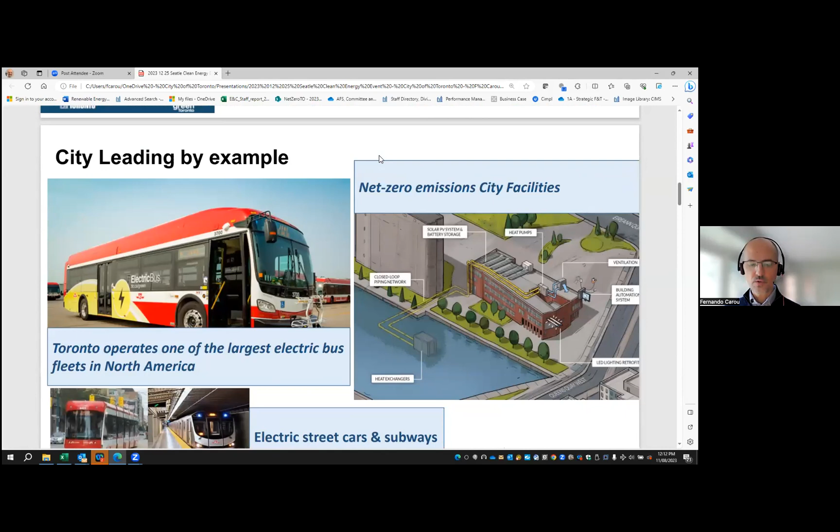We drive the policy, but of course it would be hypocritical if we don't lead by example, which we do. The City is operating one of the largest electric bus fleets in North America. We also have electric streetcars and electric subways, so once the buses are electric, it'll be a 100% electric transit system. And we're leading by making facilities net zero now, ahead of our deadline of 2040 for the city as a whole.

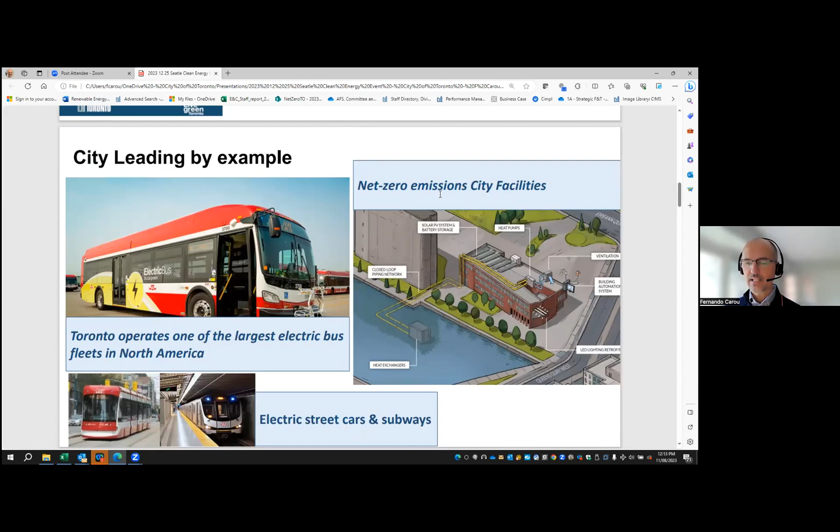The larger idea here, and we'll get to wastewater in a second, is that we're trying to leverage existing public assets, driving innovation towards reducing emissions. Toronto has been doing this for over 20 years. In 2003, we tapped the municipal drinking water system as a source of cooling in buildings. It supplies over 100 of the most iconic buildings in downtown Toronto with cold water, no heat pump required, saving in the order of 90% of energy and water, because there's no evaporative cooling towers required. Just this year we've expanded it, and we'll continue to expand it in the coming years to reach double the capacity we have.

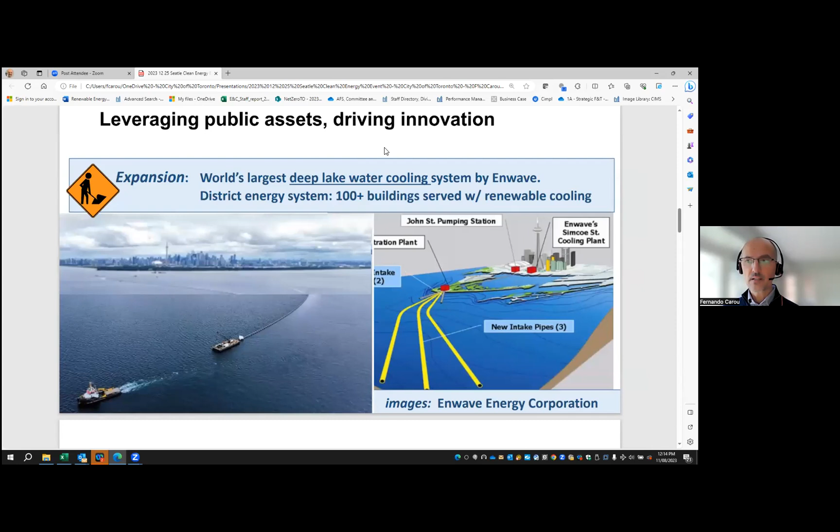You may think of Toronto as a northern jurisdiction, and we are, but our climate is very energy intensive - we have very cold winters and very hot summers. So when it comes to wastewater energy, we have a program, which I'll tell you about in a second, but we currently have under construction what we think is the largest wastewater energy project in the world.

The project partner is Noventa Energy, an energy company focused strictly on wastewater, headquartered in Toronto. This is the project where we're decarbonizing essentially the entire hospital by displacing fossil fuel use with renewable energy from sewers.

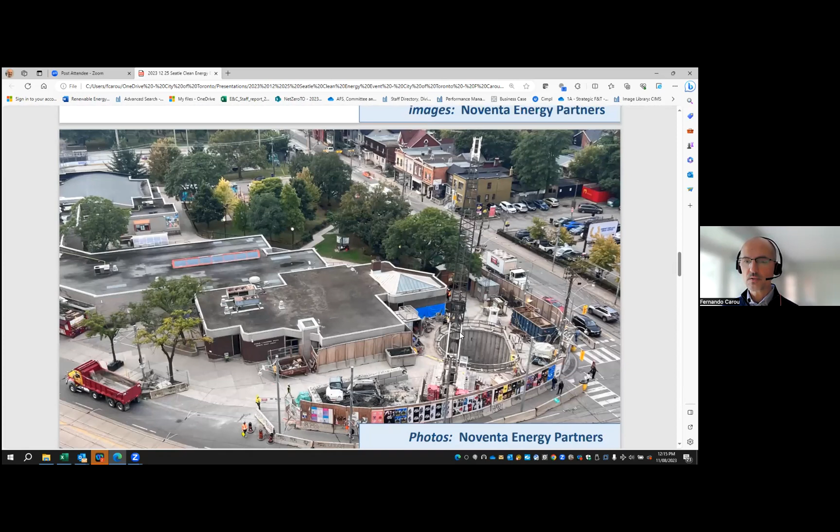So this is what the area looks like right now. Across the street on city land, there's a public library and parks and so on. You can see this hole here, and that's essentially a wet well that goes 60 feet down to interface with one of Toronto's largest trunk sewers, which serves about 1 million people, 1 million households. This is what the hole looks like, and you can tell from the scale that it's a massive civil infrastructure.

When it's operational next year, it will displace 90% of the natural gas used to heat buildings in the hospital campus during the winter, and there will be expansion of the system to serve new buildings in the campus.

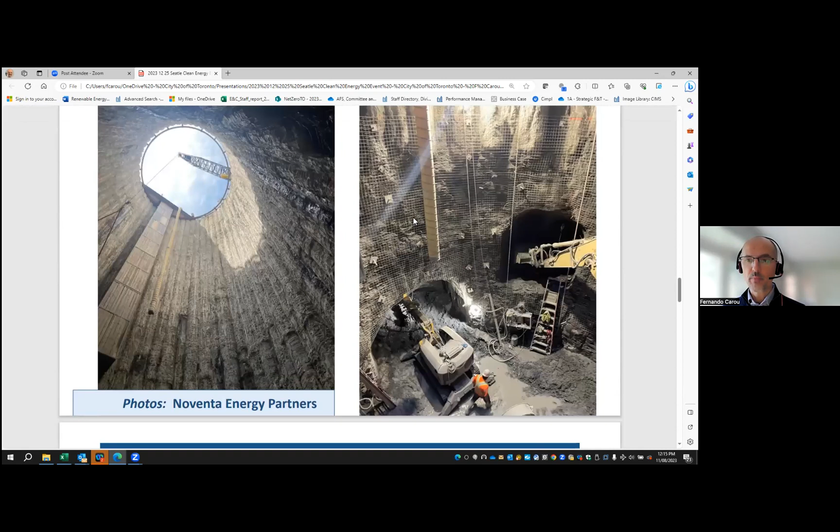So that's the project, and we do have a program, given that to move the needle and actually reduce emissions, like we have to by 2040 reduce all emissions, we want to do this as a program. We're trying to do 20, 30, 40 of these projects, so we have a wastewater energy program.

The way it works is it starts with a self-serve map where you can plug in the address, in this case the address of the hospital. It'll give you data on all of the wastewater resources closest to the hospital, and of course proximity to the resource is number one in terms of economics. There's information here around liters per second, available megawatts, and equivalent megawatts of capacity.

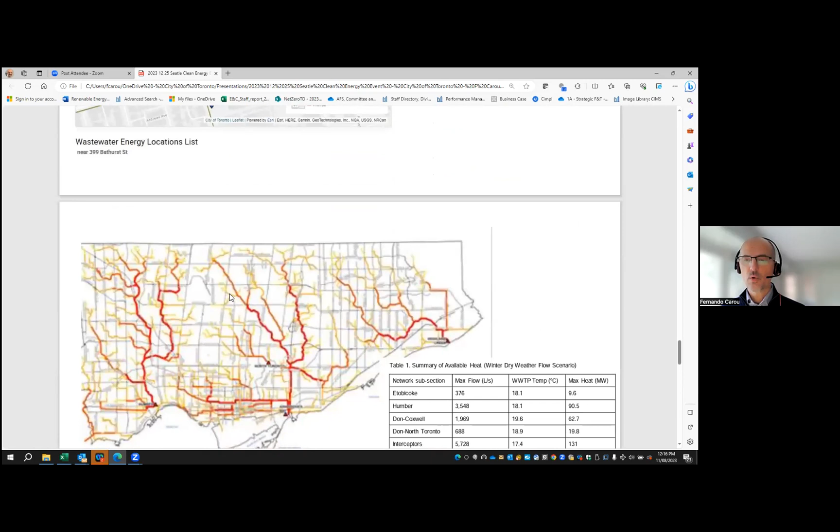And then once the wastewater resource is screened, in this case given that the hospital is so close to the resource, what we do is we go through an approval process.

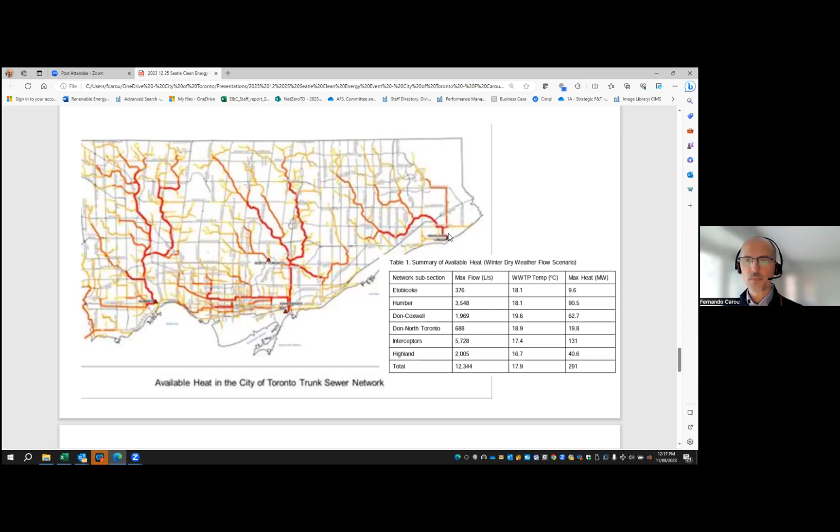To give you a sense of how much wastewater energy we have in Toronto, we modeled all of the sewer networks—these are the trunk sewers, the very large sewers. Red means more energy as the sewer connects to the 3 wastewater plants we have: one in Humber River, one in Ashbridges Bay, and one in the east part of the city. This is equivalent to about 300 megawatts that we can harvest, which would be 20 or 30 projects that could decarbonize large hospitals, universities, and government buildings.

So in summary, the concept here is for climate action. We would like to, and we are, leveraging municipal assets—drinking water in the case of deep lake cold water to cool buildings, and wastewater or sewers in the case of the hospital to displace natural gas.

The premise really is that cities and municipalities control numerous assets—streets, property, buildings, water and wastewater infrastructure. But we also have soft assets like mapping, information, and data sets, and we're stewards of these assets. So the question is, which ones do we make available, and for what purpose?

The other role we play, beyond making the infrastructure available, is that we help—again, like in the case of the hospital—go from 0 projects to 1, to the first one. That requires heavy lifting and innovation to get going, and then we typically put a program together to go from the 1 to the many.

In terms of delivery models, there's a bit of a choice to be made, or 2 extremes. In the case of deep lake water cooling, it was done through a then city-owned municipal agency, so it was what we call a direct delivery method. The infrastructure was financed, constructed, and operated by a city department, basically. Since then, that company has been spun off, and the city has realized tremendous value from that.

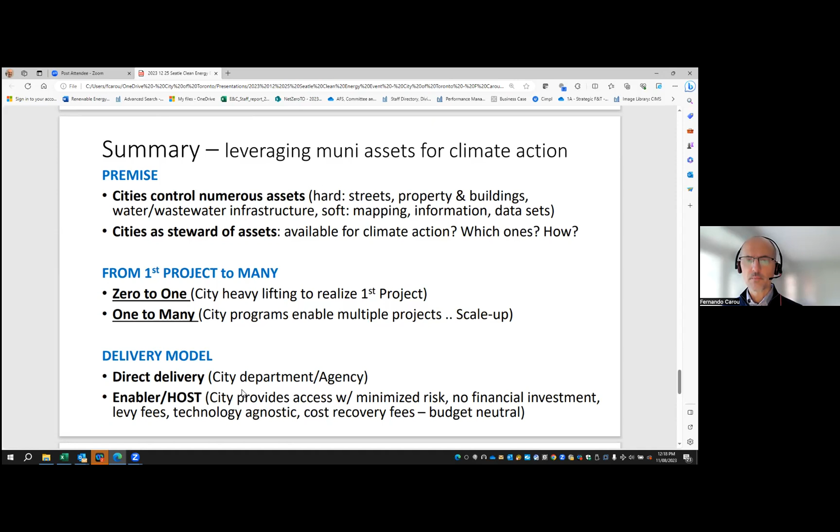So there are other options, other city assets that we're looking to leverage as well.

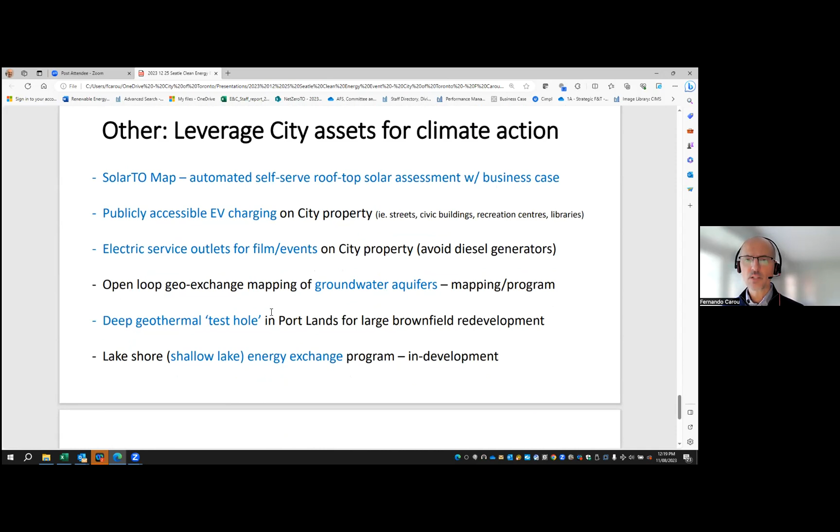Thank you, Fernando. I'm going to jump right in with a question because with Carbon Neutral Cities Alliance, we just had our annual meeting in Toronto and had a conversation about this. Fernando, you've talked a lot about leveraging city assets for climate action. Given that my work at CNCA is in communications and engagement, I'm constantly thinking about the public interface and how we build public and political will for this work. You alluded to it in your presentation, but can you talk about how you're messaging this to the greater Toronto public and private sector so there's more buy-in? I know you're using the hospital as a conversation starter, so speak to how you're using this moment to spur further similar action.

Yeah, excellent question, Michael. So wastewater at this scale, we're starting at a big scale for economic reasons. We're not connecting low density or homes yet, maybe in the future, but right now we're going after very large trunk sewers. So it turns out to be government to government, government to business right now, in terms of the opportunity, the projects, the financing, the legal agreements and so on.

But you make a good point. We'll have a local TV crew do a live show in early December as part of our climate action communication, because we're the stewards of this infrastructure, but it's not really ours, it's paid for by Torontonians through their water bill. So we're conscious of that, and we want to tell the story of what's happening in Toronto, that we're trying to innovate and do it in a way that represents almost zero risk to residents and their water system.

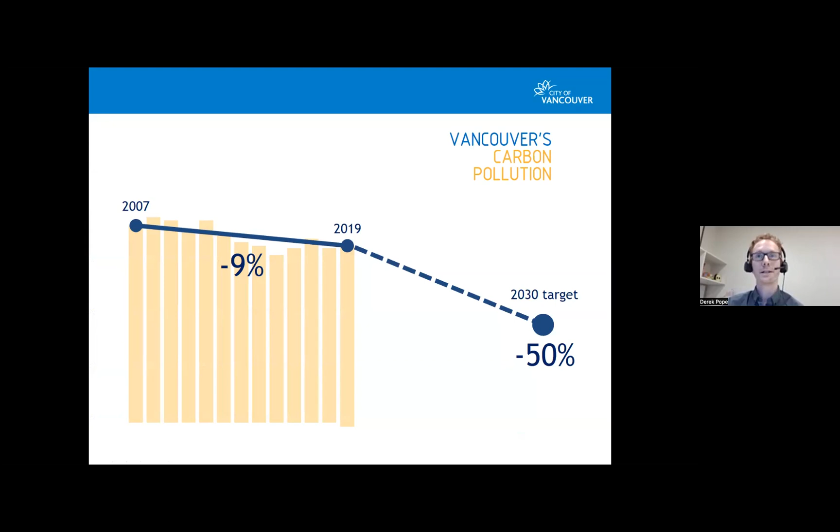To start things off, this is the challenge we're all facing. We need to decarbonize. The City of Vancouver has some very aggressive targets—we're looking to reduce our greenhouse gas emissions by 50% by 2030. When we look at where emissions come from in a city, the one thing that always stands out for me is just how much buildings contribute to our greenhouse gas emission portfolio, representing 55% of the city of Vancouver's emissions.

This is really why the Neighborhood Energy Utility exists. It's one of the tools that we have for tackling this challenge of moving to a more sustainable path for heating our homes.

Quick overview: the Neighborhood Energy Utility has been in operation since 2010. It is a city-owned and operated thermal energy utility, supplying low carbon space heating and hot water to an area within Vancouver. We operate it as though it's a commercial utility, so our rates are designed to recover all of the costs of the utility and a modest return on the city's investment. Currently, we target to deliver 70% of our energy from renewable sources, and as part of the city's Climate Emergency Action Plan, we have a goal to transition that to 100% renewable energy by 2030.

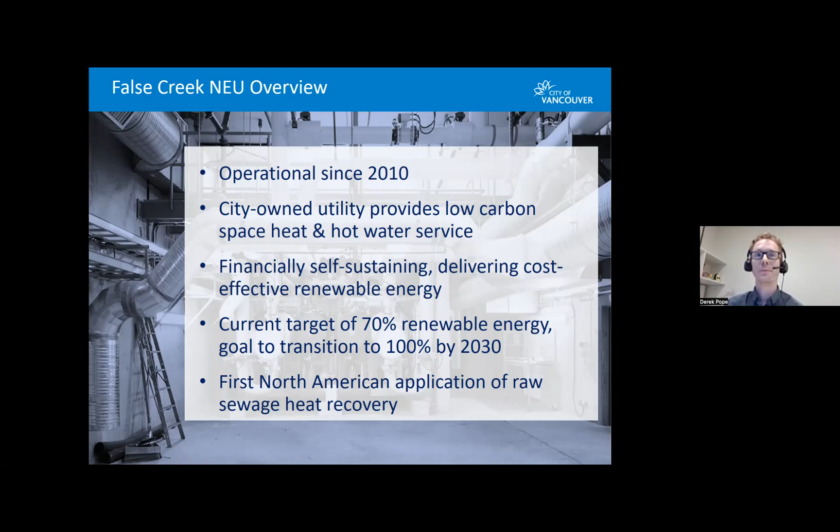What we've done is built our energy center on top of a sewage pumping station. Sewage is warm because we all take hot showers and run the dishwasher, and there's so much thermal energy stored within sewage—enough there for us to literally heat up a neighborhood. So we take some of the heat out of the sewage before it gets pumped onto the wastewater treatment plant, and we send that heat right back to the buildings all over again. A really nice energy cycle, working towards closing the loop there.

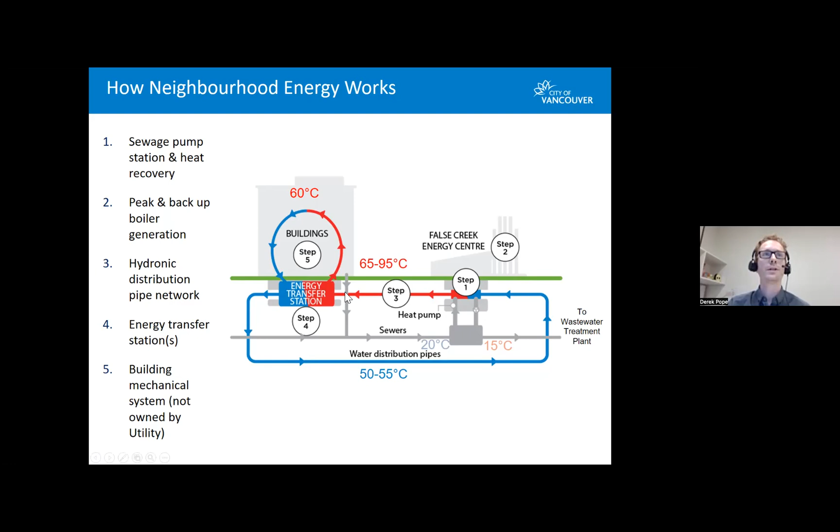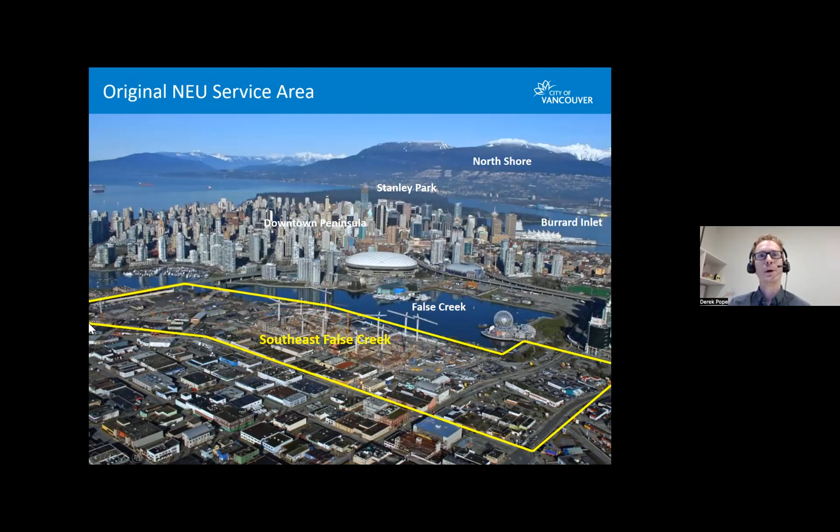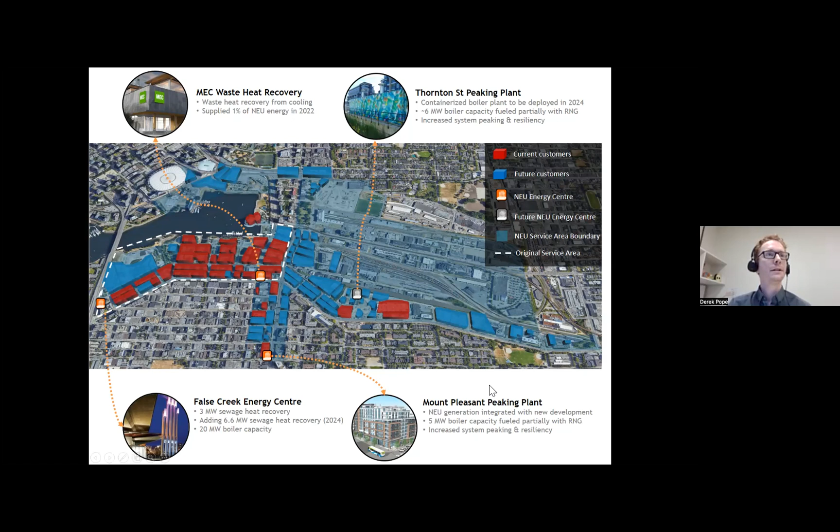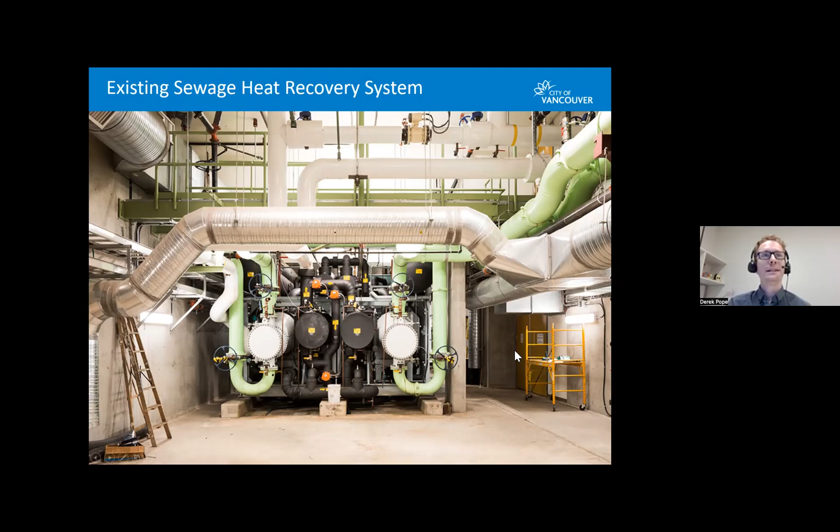Sewage stays relatively consistently warm, so the efficiencies of the heat pump remain over 300% even on those minus 10 degree days. So you make really efficient use of the electric grid, and that's something becoming more and more prominent in the conversation.

Moving on to our expansion project. We're at the phase now in the build out of the system where we're ready to deploy the next phase of sewage heat recovery. We're in the process of adding another 6.6 megawatts, which will more than triple the capacity we have today.

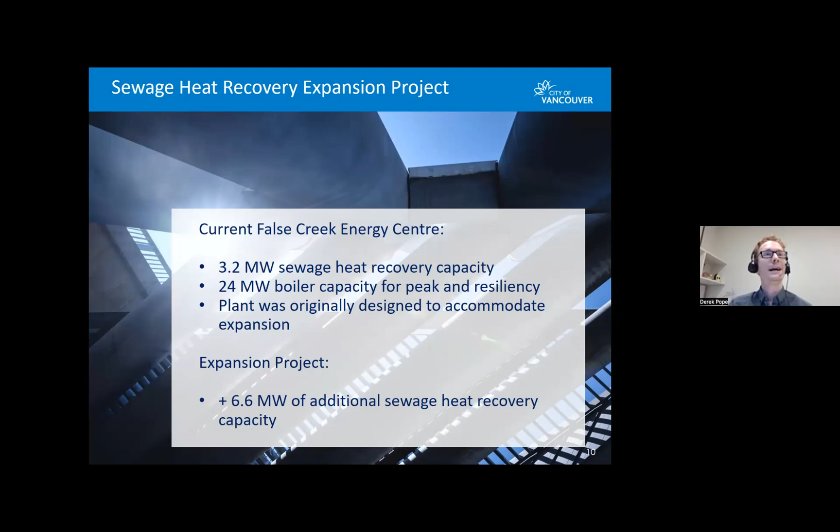Here's a schematic of the plant. Basically what you're looking at is a sewage pumping station. Sewage flows into what's called the wet well here. On the dry side, we have pumps that pump it off to the wastewater treatment plant. We of course take some of that sewage and extract the heat out of it through this heat pump. Here's the project area we have to work with.

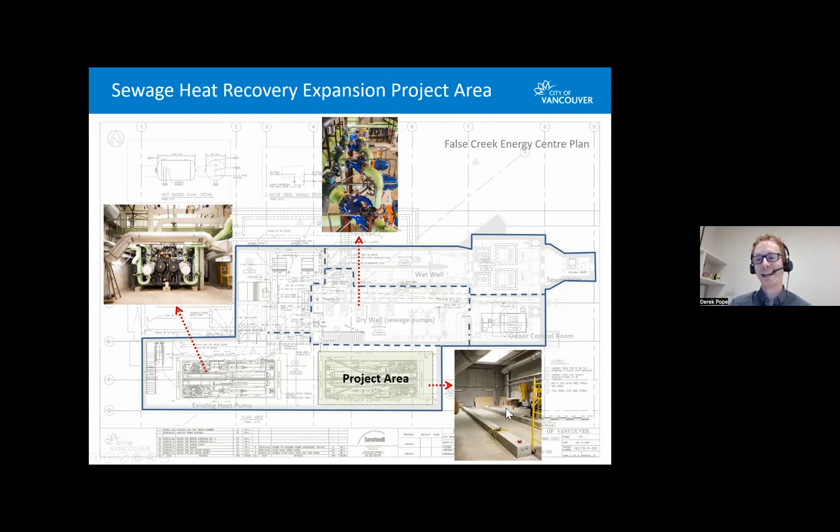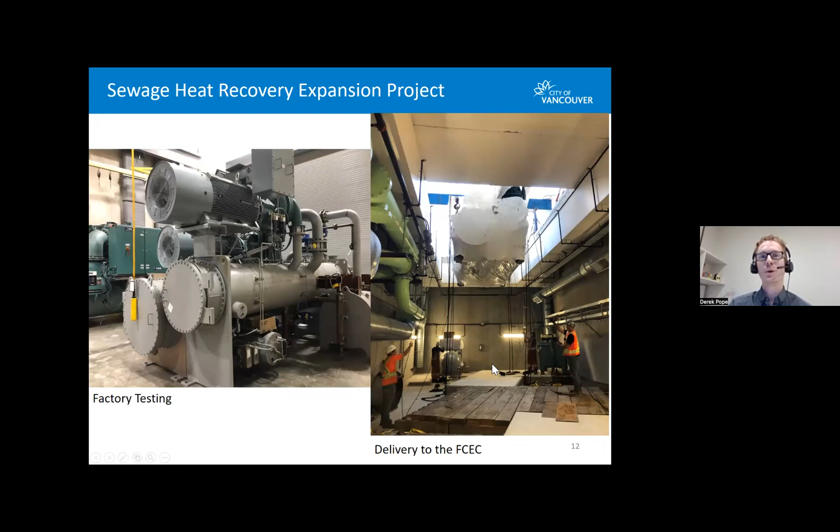Someone had the foresight to plan for system expansion, and for 10 years I've been showing a big empty space that one day will get filled. I can tell you this picture is now out of date—it's a very full room. We had 2 new heat pumps lowered into the energy center earlier this year, and work is now underway to get it connected. We had to bypass the sewage pumping station to do some key tie-ins.

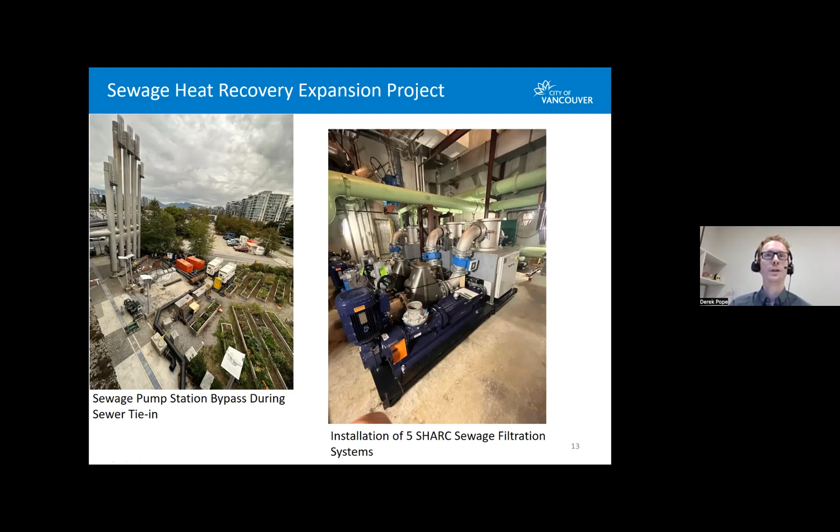We're also adding SHARC sewage filtration systems to pre-treat the sewage before it comes into our plant and through our heat pumps. Lots of work going on, but we're looking to commission that in 2024, which will give a really nice boost to our low carbon energy security.

And just to close out, one thing that's been really rewarding is seeing how much district energy has evolved in the greater Vancouver area, and this helps illustrate that. Back in 2010, when the NEU was established, there were a couple of existing systems, but they were using almost exclusively natural gas. We really wanted to demonstrate district energy as a platform for decarbonization.

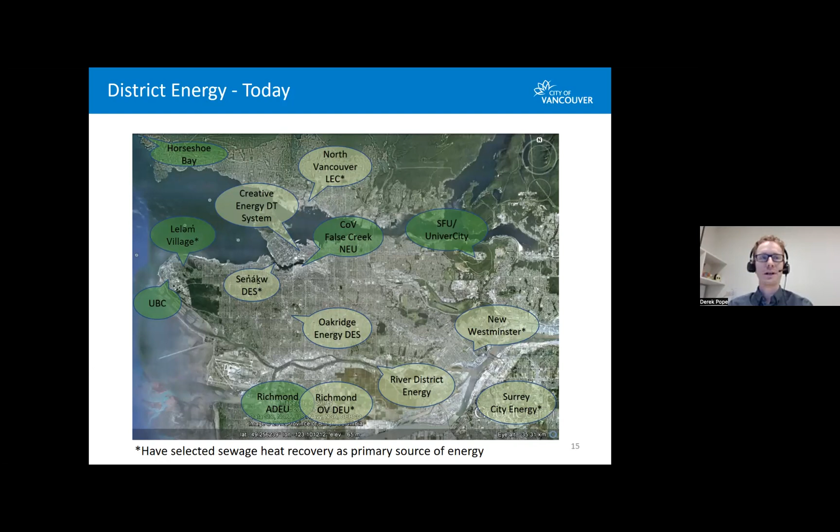Here we are today, and what you're seeing is, first, the existing systems have been decarbonizing, fuel switching off of gas using a wide range of different energy sources. You also see an explosion of systems being created, and most rewarding for us, the systems with an asterisk next to them—these are systems that have selected sewage heat recovery as their primary source of low carbon energy. It really shows how much things have changed since 2010, when the technology did not exist in North America, to today, when multiple systems just in the greater Vancouver area are going with sewage heat recovery as their energy source.

So that's the end of my presentation, and thanks for the time today.

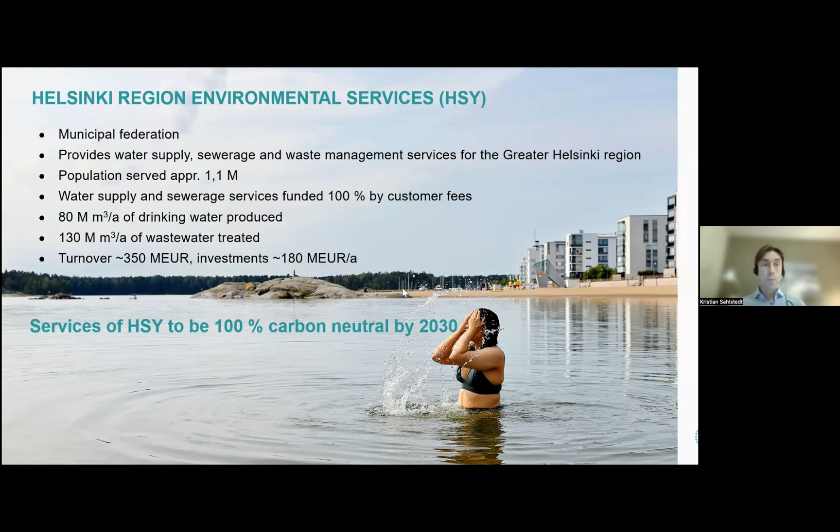It's discharged to the Baltic Sea at a distance of about 8 kilometers from the shore. At the beginning of these discharge tunnels, there are two heat pump plants owned and operated by local energy companies, and these are fairly big plants. I'll show you some data about them shortly, but we are recovering heat from treated wastewater, not raw sewage.

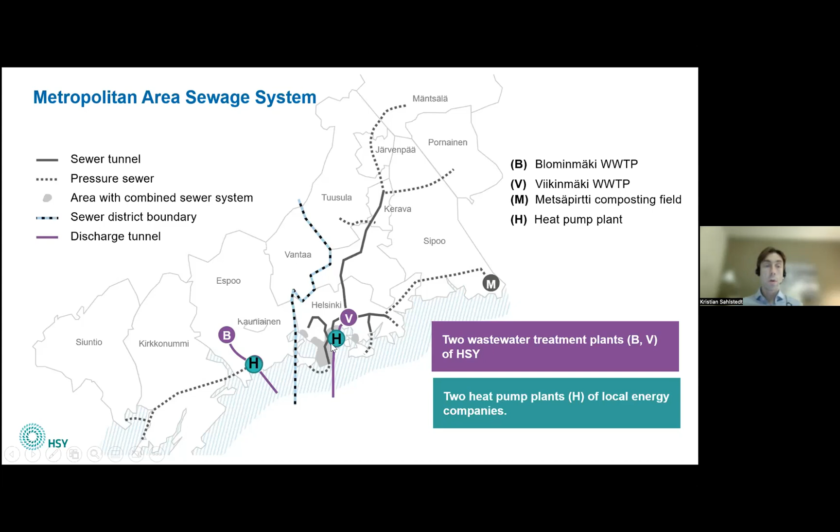This is what our wastewater treatment plants mostly look like. Up here in the Nordic capitals, we like to build them inside bedrock. In short, we have two treatment plants, one dimensioned for a population equivalent of 1 million, the other for 400,000. For those who know about wastewater treatment, the treatment process at both plants is essentially activated sludge and anaerobic digestion for sludge treatment.

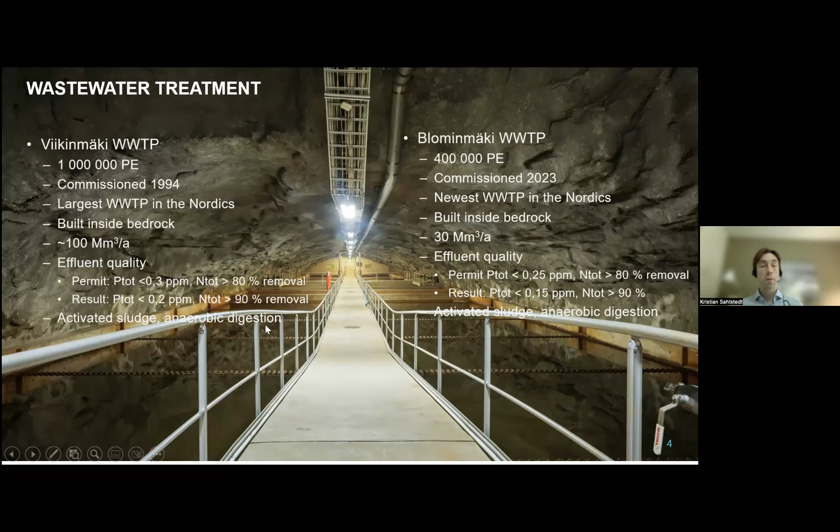The energy at the treatment plants—our main energy source is biogas, which we get from anaerobic digestion of waste sludge. Waste sludge is produced in the wastewater treatment process as a byproduct, which needs to be treated one way or another. We use anaerobic digestion, which basically converts the organics of the sludge into biogas.

We use the biogas 100% by ourselves. The main method of biogas usage is through these biogas-powered CHP engines, which we have on both of our treatment plants. That produces most of the energy which we use at the treatment plants.

Then we have some additional methods for extracting more energy. One is these ORC exhaust gas turbines, which are connected to the CHP engines. We have solar panels on top of both our treatment plants and pumping stations, and a small water turbine in the effluent discharge. As a whole, the Viikinmäki plant, the bigger one, is more than 90% self-sufficient in energy. Blominmäki, the newer one, is approximately 70% as the design figure.

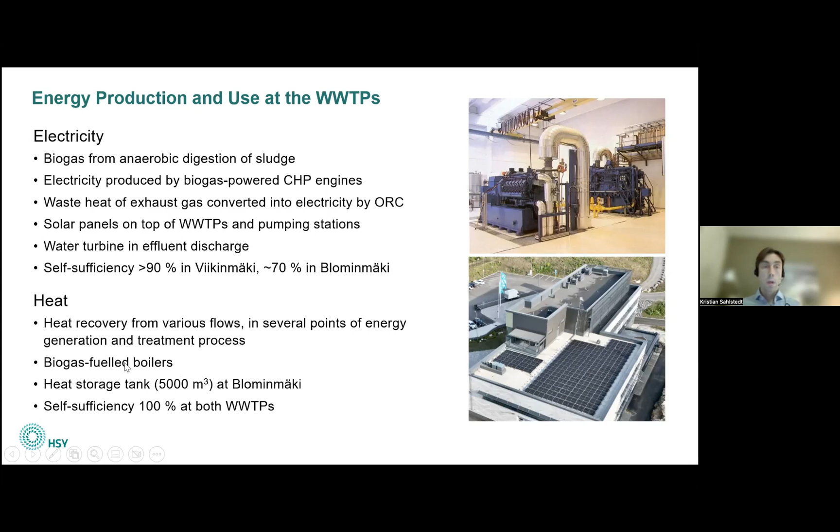About heat recovery from treated wastewater: there are 2 heat pump plants, which I just showed you on the map, and they recover both heat and cold from treated wastewater. In Helsinki there is a district heating network and district cooling network, and in the neighboring municipalities there is only a district heating network. The biggest and oldest plant is the Katri Vala heat pump plant, which is extracting heat from the discharge of our main plant, Viikinmäki plant.

The production potential for heating is 126 megawatts and 80 megawatts for cooling, which basically means it takes care of 7% of district heating of the city of Helsinki and actually 90% of district cooling.

Helen Ltd, which is a local energy company, is at the moment designing a new heat pump plant which will utilize the same wastewater flow already used at the Katri Vala plant. They have calculated that it is still feasible to build another one after that, with another 90 megawatts of heating potential and 60 megawatts of cooling potential.

And then in the western area, there is the Suomenoja heat pump plant owned by Fortum Ltd, which has 60 megawatts of heating potential.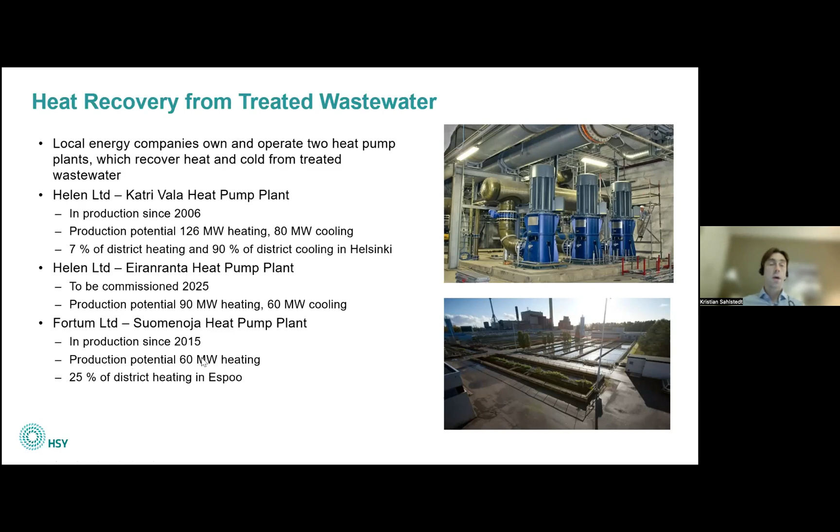So this is our citywide-scale heat recovery, and a few words about how we are trying to go towards carbon neutrality. Optimizing the energy balance and climate impact of our wastewater treatment plants is a top priority for us.

Actually our main target at the moment is not so much energy efficiency, but nitrous oxide emissions, because the energy production of HSY—or energy production of wastewater treatment and also water treatment in the Helsinki water utility—is basically totally decoupled from carbon.

All energy which we purchase from outside comes from renewable sources, and most of the energy which we utilize we make ourselves. That means that nitrous oxide emissions are actually our main source of climate emissions, and we are doing a lot of work to mitigate those.

We are all the time trying to optimize our energy balance. We have an optimization feature built into our automation system, which is continuously checking the spot prices of electricity on the market, and based on whether electricity on the market is cheap or expensive, it's controlling our own energy production and energy consumption.

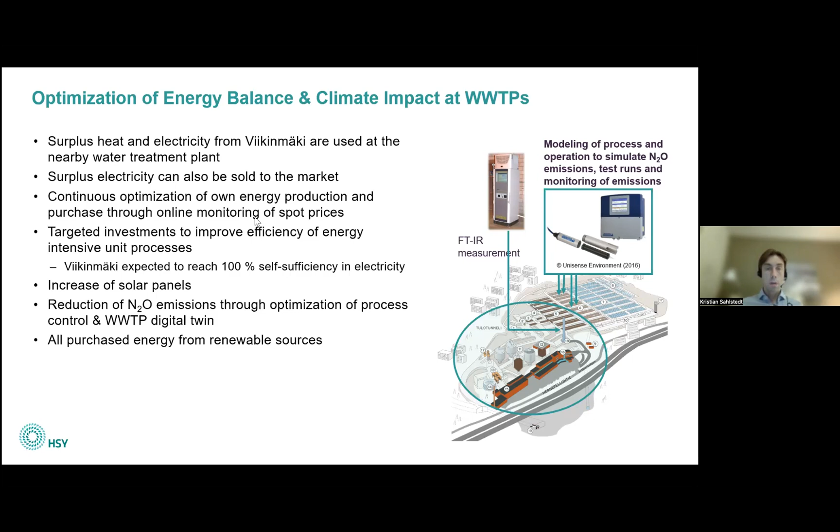This is a graphical presentation of the energy balance of the Viikinmäki wastewater treatment plant. We have 4 different sources of energy: we can buy electricity from the market, we have solar panels, and the most important one is biogas.

Then we can recover heat from air and sludge. We have energy generation from CHP engines, the most important ones, producing electricity and heat, ORC exhaust gas turbines producing electricity, gas power boilers, and heat recovery from the plant's internal flows.

We use the energy both at the wastewater treatment plant—most of it is used there—and then we continuously direct some of the heat and electricity which we produce to the neighboring drinking water treatment plant. And if there is surplus after all this, we can also sell the rest to the market.

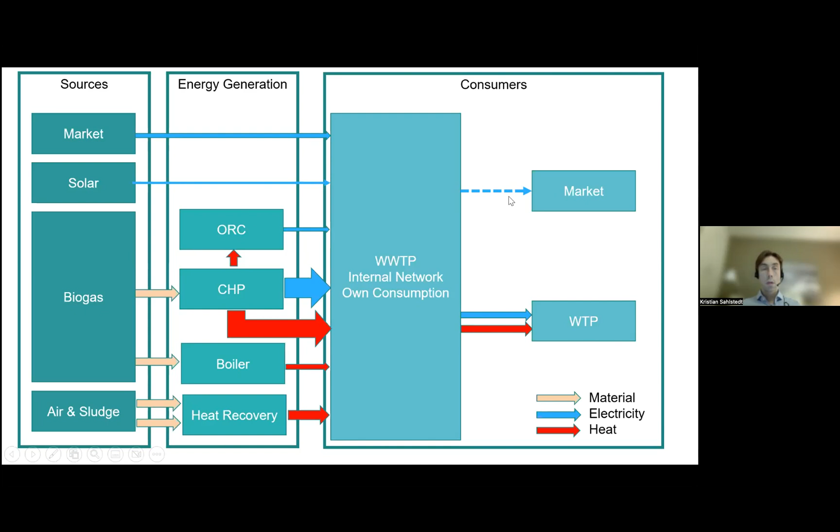That is basically what I had to say. So excellent, thank you, Kristian.

Over to you, Michael. Thank you so much for that presentation. I recognize some of those photos because we had our Carbon Neutral Cities Alliance annual meeting in Helsinki before COVID, and many of us got to go down into that bedrock and check out exactly what you showed us, and that was a great experience for all of us to be underground and seeing what you've built out.

It's very impressive. Questions for Kristian from any of the panelists or guests? Kristian, great, thank you for the presentation. Quick question actually, it's impressive.

Just to confirm, are you saying that there's no fossil fuel use at all in the running of the wastewater plants? No, not at all.

That's very impressive. Maybe we can do a sidebar. I'd like to know a little bit more about your energy consumption per liter of water treated, and wondering if doing it underground in the bedrock, as opposed to in North America where we have more land availability and do it above ground, especially in the winter, makes a difference. We tend to use a lot of natural gas to heat the sewage in the winter, so I wouldn't mind comparing notes with you, because that's really where we want to go. We'd like to have continuity - we use biogas, but it's not fully replacing the natural gas use.